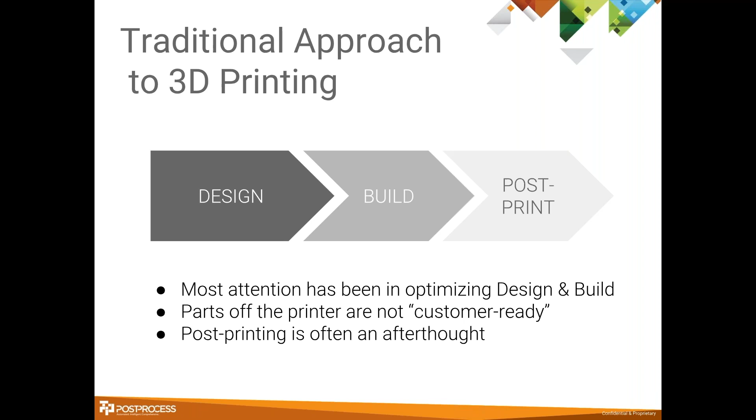We want to dive a little deeper into what this problem causes when we're not able to truly optimize our post-print solution. What we see, and hear a lot from our customers, is that as they're scaling, as they want to take advantage of the speed and agility of 3D printing across different platforms, and increase volumes to get repeatable, customer-ready results, they realize they have a shortcoming in their workflow.

Because a lot of the current methods today really revolve around, number one, manual labor. Whether you're picking up a pick, maybe a grinding wheel, or just tools lying around, trying to get this material off to get these parts how they were intended when you designed them.

So you end up also reaching for traditional manufacturing approaches. Your facility might already have bead blast equipment or an old school tumbling machine. You try to throw some parts in there and realize your parts are breaking, it's cumbersome, and you don't have the right people trained properly to operate this equipment. A lot of challenges start to show themselves as you continue to grow.

And they don't solve the problem, because manual labor is always time consuming. There's almost an artistry element to it, where someone has to be a craftsman to be consistent, whether hand sanding or using different tools creatively to clean these unique geometries. So that's very time consuming, and it's really difficult to get consistent results.

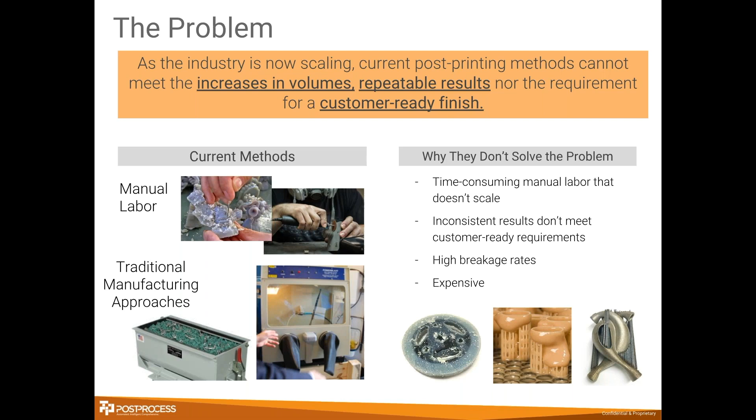With that problem, we want to talk about our solution. At a high level, these are our beliefs here at PostProcess: it's really about automating the finishing of 3D parts through a comprehensive system of hardware, software, and chemistry. And then our three key benefits.

The first being consistency, which is actually the number one benefit - that kind of surprised us, but based on customer feedback, that's where the industry is going. They want parts that are repeatable time and time again, whether operator A, B, or C steps in. They want to be able to get consistent results, and they want to really create a channel for unlimited throughput.

And of course, they want to make an investment that's going to make them their money back. So we understand how important that is.

Hardware and software chemistry all in one place is truly unique, and really our backbone is the software. What the software does is ensure that the hardware and chemistry are working together in unison, really optimizing the chemical and mechanical energy.

So you see a couple examples over there: motion, ultrasonics, fluid flow, heat. We get into things like pressure and friction and all these sorts of what we call rates of removal. So the software side of things really allows us to take advantage of those different energies and optimize it.

And not only that, continue to grow. So we're not a static solution. We continue to evolve because we have software as our platform.

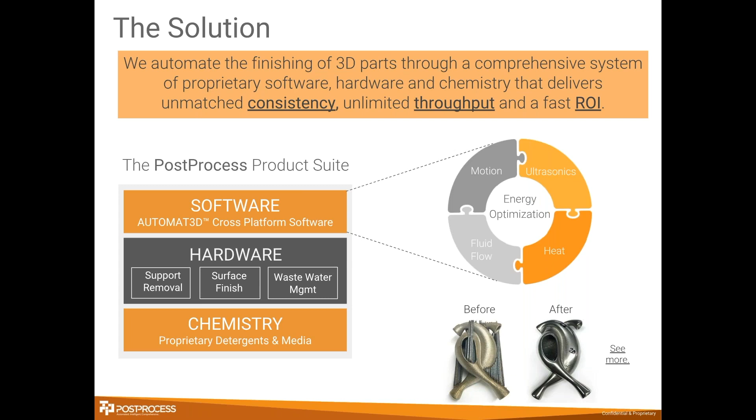Just to highlight these key customer benefits: repeatability, even with complex parts. And that of course is the real challenge. These nooks and crannies, interior channels, and all these different challenges that, time and time again with manual labor, people are human and they're going to miss things, and that can become really challenging to get that consistency.

And then actually removing that bottleneck, as I mentioned, if you're printing 100 parts a day, but you're bottlenecked to only post-process 5, then of course you're going to run into issues.

And then being able to produce and post-print in batches, really significantly reducing labor costs.

And really what we like to talk about is repurposing those labor costs. So someone might be doing this hands-on work that you can automate and use that skill set in a different way throughout the facility or manufacturing workflow that really takes advantage of some of that repetitive hands-on work and really get that ROI. So minimizing breakages, reducing labor costs, really getting a fast payback compared to industry standards.

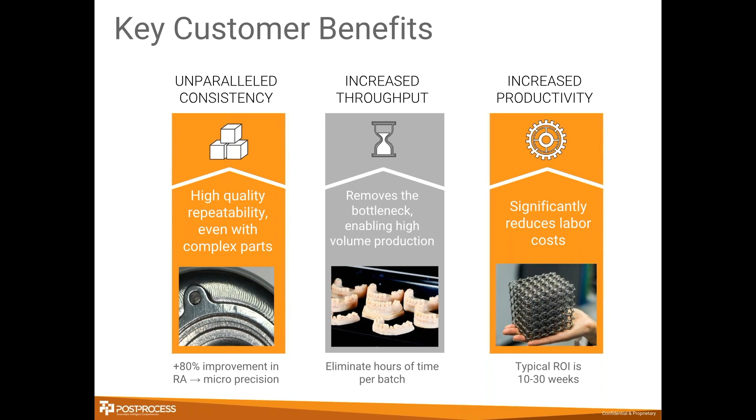So to sum it all up, yesterday's standards are very restrictive. It can be very expensive, especially when people start diving into it and crunching some of these numbers that tend to slip under the radar sometimes. Very time consuming.

It's very hard to create a predictable workflow and make promises to customers when you create this bottleneck. And of course, we're talking about opening up that bottleneck with automated, intelligent, and comprehensive solutions.

So we get into both support removal and surface finishing. It was highlighted in the previous slide. I glossed over a little bit, but what we're going to be diving into is both our support removal and surface finishing solutions to show how we could add value to you and your customers.

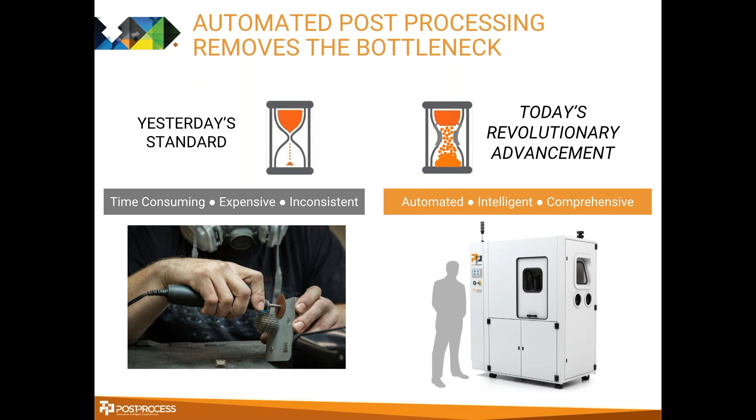So we'll start with the support removal solutions. We really have two different levels, I'll call them, of support removal solutions. And first, I'll introduce just the design series.

So these are very desktop compatible, very small units, might be great for the education department, very small parts, maybe very low volume. These particular units have ultrasonics and they also have heat. What they don't have is pump flow.

And I mentioned software. These units have a very simple PLC software, and I'll get into our platform in a moment, which really takes it to the next level. But there is some software controls here, but these are really our small support removal solutions, and it's for basically a niche low volume market.

But of course, we're talking about providing people the opportunity to scale. So I want to spend more time on the production series units.

And this is where we start really getting into our software, which we call AUTOMAT3D. I'll do a segment on that in a moment where we'll really dive into the value of our AUTOMAT3D platform system. But these production series units are really for high volume, low labor.

So what we're talking about here is actual batch processing and really leveraging that power of software. So we get into two main technologies here.

As you can see along the bottom, you have a couple different icons. So this first set here with the Centi and the Demi, this is called Submersed Vortex Cavitation, and we'll dive into that. And then we have the DECI and the BASE, which is actually a spray technology, completely unique to the industry, and that's our VVD, or volumetric velocity dispersion technology.

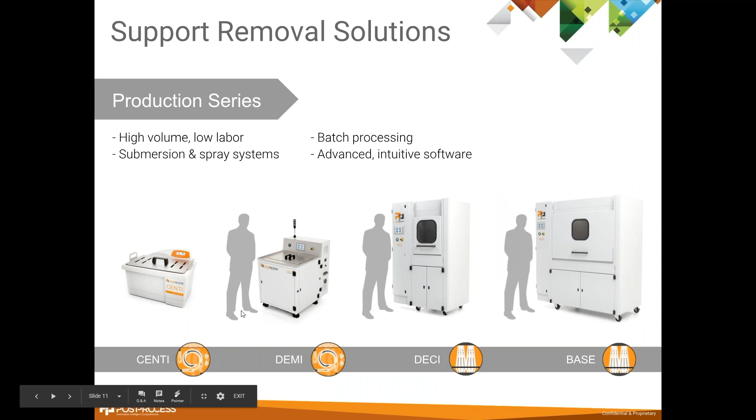What these units really do is create a rotating motion while parts are immersed in fluid, disposing of support material to provide even exposure and induce mechanical agitation. I mentioned mechanical rate of removal and chemical rate of removal, and what we're doing here is trying to bring those together.

You want to submerge a part in our proprietary PPT detergent. I'm sure you've heard of different SCA tanks or waterworks systems, and you might say, okay, I've submerged something before. The real difference here is the vortex action that we're able to create.

The idea is you might be able to submerge a part, but if it sinks to the bottom or floats to the top, you're not giving it even exposure to temperature, ultrasonics, or the agitation of fluid flow. So we want parts that want to float to sink a little, and parts that want to sink to float. You want to create this suspended, vortex action to get tumbling while submerged, for even exposure to ultrasonics and other mechanical energies. That's the big difference.

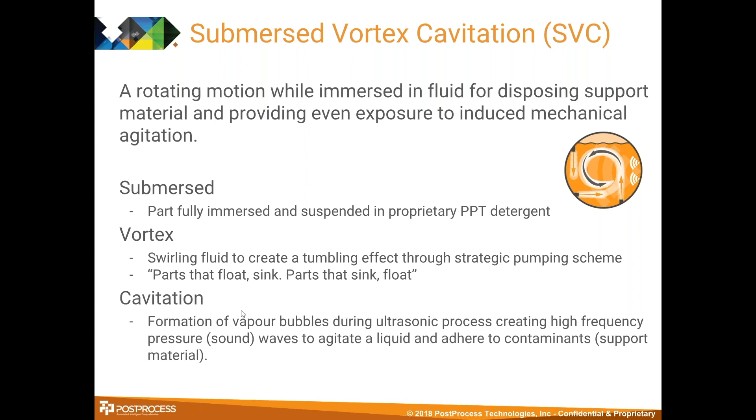Cavitation is really just the ultrasonic side of it. Those are sound frequencies creating vapor bubbles, a mechanical means of agitating the support material, working like scrubbing bubbles to remove that support material.

We like to show a schematic of this. Basically what you're looking at is the vortex action with the ultrasonics on the right-hand side. I won't dive too deep, but the technology here is really about suspending the part so it gets even mechanical agitation to expedite the support removal process.

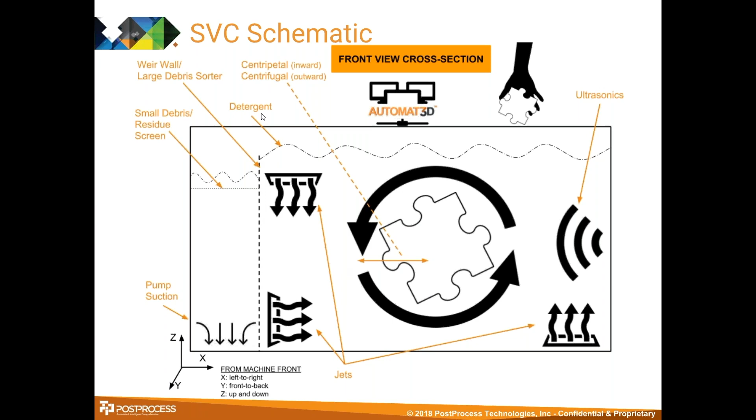Another huge advantage here is the filtration system we have to extend detergent life and minimize maintenance.

The next technology is the volumetric velocity dispersion, the VVD, our spray technologies. The big difference is we're using fluid flow, so these parts are not submerged. They sit on a part tray exposed to high volume, not high pressure—only around 25 to 30 PSI—getting doused in the chemical without having to submerge. This gives great cycle time improvements leveraging this mechanical agitation, fluid flow, versus just submerging.

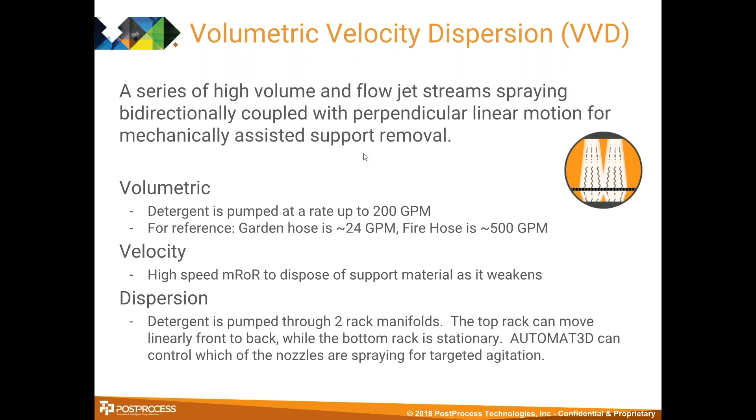This is another great opportunity for soluble support removal, in FDM, PolyJet, and even SLA resin removal. Essentially you put a part on the tray, with a spray rack on top and bottom. The one on top moves back and forth to create a sweeping motion. It's a primitive explanation, but you can almost think of it like popping it in the dishwasher—of course much more complex—putting parts on the tray and leveraging the fluid flow and chemistry to expedite cycle time.

Very minimal maintenance, simple filtration, very much a one-touch button to process your parts—a very powerful, unique technology in the industry today.

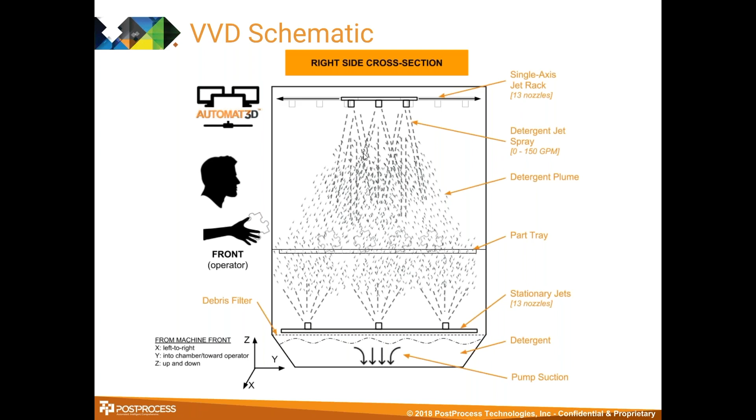So those are our two main support removal technologies. I want to make sure we have time to dive into the software and chemistry, so I'll move right to surface finishing and hopefully save time for questions at the end.

Surface finishing: we have design series and production series again here. On the design series side, these are designed for simple, one-touch, pre-programmed frequency and cycle time—a one-stop shop, versatile machines that minimize complexity. If someone just wants simple operation without getting into the software, just a one-button touch to process a wide variety of parts, very low decibel, powerful systems.

We have two designs here: the Rador, a rectangular surface finishing solution, and the Levo, a circular, higher frequency design. These are one-stop shops—plug and play, press a button, powerful solutions.

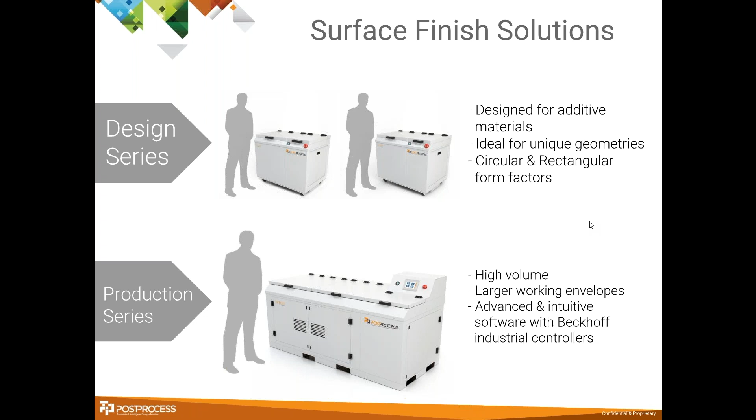And then we have our production series unit, the Nitor, which does involve our automated software, which starts introducing agitation similar to our support removal units that use different ways of agitating mechanically to be able to vary frequency. This can work with much higher volumes, much larger working envelope. Both of these solutions are considered suspended rotational force technology.

Essentially, you're putting parts within media, and the big difference here for us is being able to digitally control that amplitude and really control the force applied to that part. That's the real power of suspended rotational force, which is really unique in the industry, being able to dial in those frequencies to handle your most fragile part all the way up to robust alloys. That's the unique power of suspended rotational force.

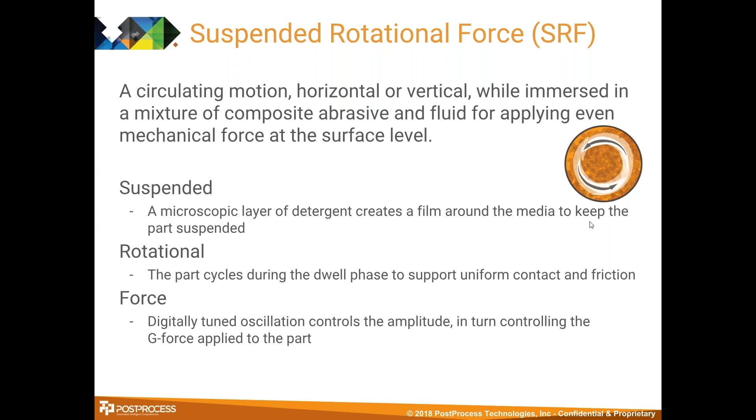So if we look at a cross section of the SRT technology, essentially what you're looking at is us being able to control what we see here, the amplitude is Y1 and the potential energy is Z1. So we can really control this amplitude to optimize that dwell time, optimize the time that this part is submerged in media. And when we're able to control the frequency, we start to generate this additional force that creates this additional rotation for us.

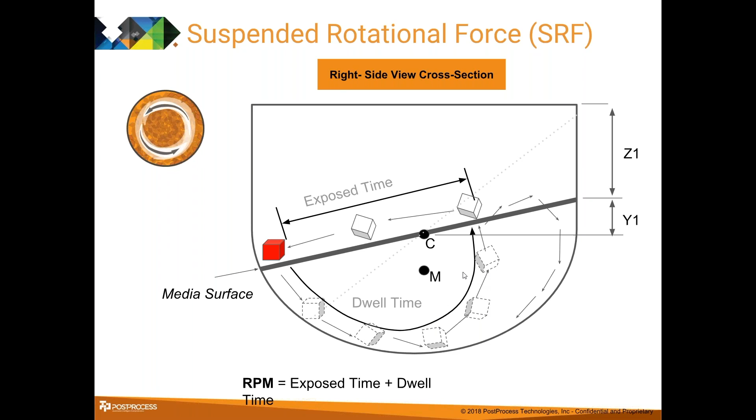So while this part's submerged in media, it almost rotates like a planet, orbiting. It rotates itself, but it's also rotating on a larger axis. That's what we want to be able to do to really optimize that time that the part is submerged in media. And being able to digitally control that is what gives us the unique advantage.

And then we also have the hybrid solution. In the hybrid solution here, we have one machine that falls in this category and is very powerful, and it's the Deci Duo. So really, this is a spray technology that also involves suspended solids. It's very versatile, being able to adapt to different support removal technologies or challenges, as well as surface finishing challenges, all in one machine.

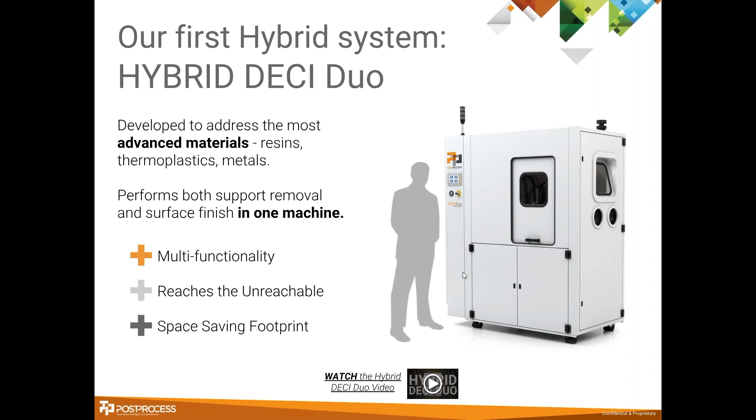So it's unique in the sense that it uses a spray technology, but instead of high volume like we're talking about with the VVD technology, this is much more direct, higher force with suspended solids. So it's much more of a mechanical means of removal. Excellent for different surface finishing.

We've had a lot of success with this technology with powder removal. So MJF and SLS, being able to remove powder and do initial surface finishing all in one step.

And really the unique advantage here, or the key word I like to point out, is the fusillade technology — really the controlled jetting, being able to either provide a high powered blast to be more aggressive for robust parts, or dial it way back to surface finish different polyjet, FDM, or SLA parts. So a lot of flexibility with this unit as well.

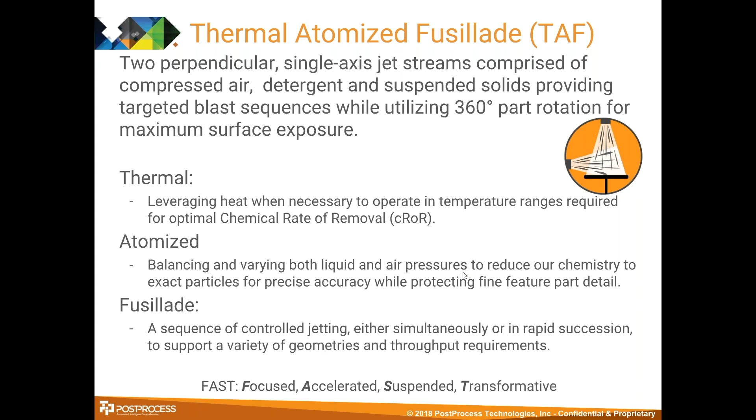So this is a quick schematic of what that looks like. We have two single axis jets, those high powered jets that we can control with our automated platform, and a turntable in the middle as well that allows really complete coverage as we're able to move those jets up and down, back and forth, and rotate the part.

So a lot of advantages to be able to dial in if you want to just focus on a specific surface with this, or if you want full coverage — just a lot of flexibility. And really what gives us that flexibility across all of our machines is the software.

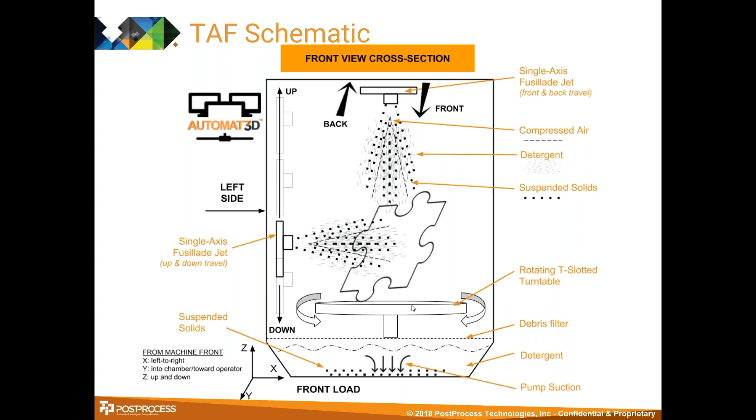So just a brief software overview, because I know we're running up against the clock here. We have so much to share, but really what it boils down to is the agitation algorithm. So we don't take just a single approach. Other machines, you might just find you sort of turn it on and set a temperature. We have pre-programmed recipes that vary the agitation levels and temperatures.

One of the examples I like to use to have people wrap their mind around it: if you were washing your dishes at home, you wouldn't just spray your dishes and leave it in one spot, right? If you had a bowl in your hand, you'd be rotating the bowl, rotating your hand with the sprayer, maybe varying the temperature, hot and cold. That's what we do, and we automate it.

So we're able to dial in for those needs. For those fragile parts, we can dial back the temperature, take a less aggressive approach as far as using agitation goes, or we can take a more aggressive approach for those robust parts to really optimize and dial in that cycle time for customers.

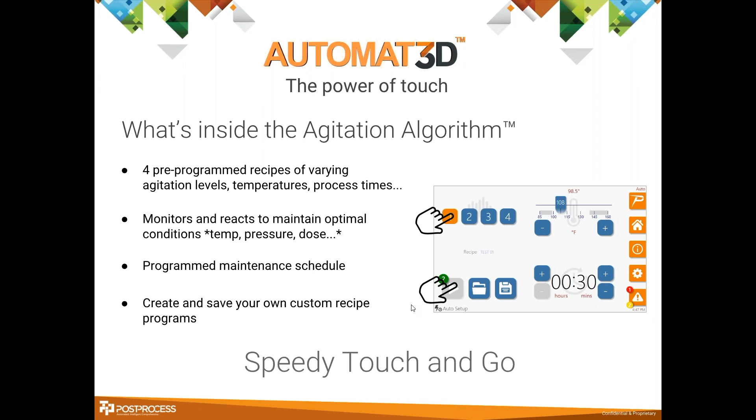And the beauty of it is once you dial it in, you can save it. So a user doesn't even have to worry about all those background parameters. They can just pop a part in, call up a recipe or an agitation algorithm, press play, and get those repeatable results we talked about at the top. That's the power of automation—it becomes very intelligent for the operator and really gives them peace of mind.

You know you're running these optimized, proven-out algorithms, and you're also able to have other advantages such as maintenance reminders and different alarms to make sure the process remains in control. So the temperature you set, the system will understand if you're getting out of range, and it'll understand if your tank level is getting low and that's throwing off the pH balance.

So all these reminders give you peace of mind, so you don't have to worry about these things. AUTOMAT3D is going to run the cycle for you and also make sure that anything that impacts that cycle is going to be monitored as well. So, very, very powerful.

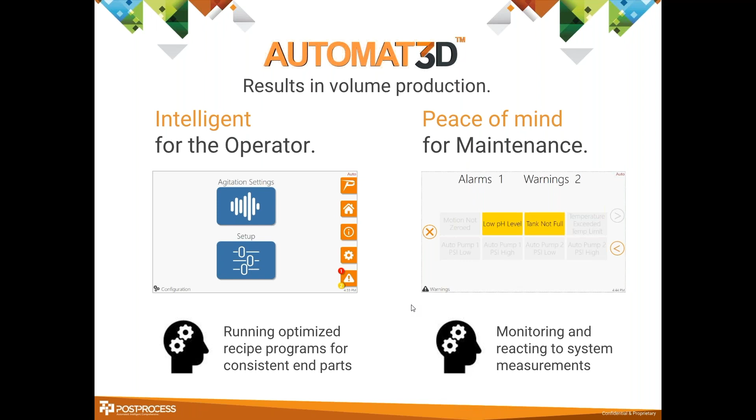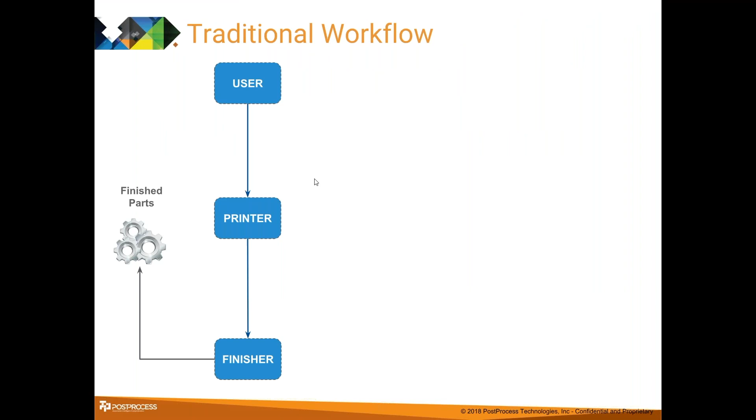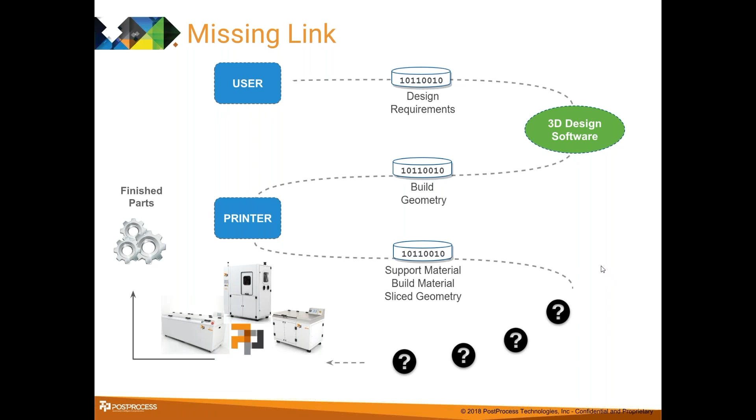One of the things we like to touch on is that AUTOMAT3D can go beyond what it's doing today. You have this traditional workflow that goes from the user to printer to finisher. We like to talk about this digital thread, and we're doing a great job connecting that today. In the future, we're looking to get to a position where users can just upload their STL files, and we can tell them, hey, this is what you're looking at for a post-print cycle time, a post-print solution, a post-print technology.

So we've started to unveil what we call our connected technology. I wanted to share this to give you a view down the road of the direction this is heading. As our customers adopt the software technology, they're really setting themselves up for a great foundation for the future, as people introduce digital factories and so forth.

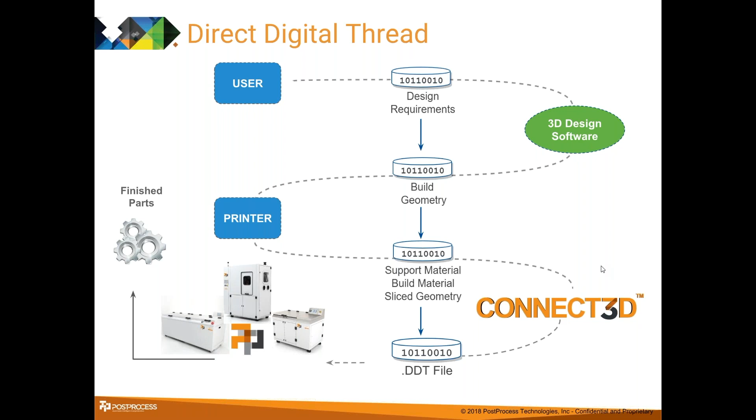So we do have a proprietary DDT file. I won't spend too much time on that, but it's really taking in all these different factors to make sure you're getting an optimized solution.

The last point I'll touch on is our chemistry. We have proprietary detergents for all your common support removal needs, whether it's PolyJet, FDM, or SLA, and we also have different media to address both the SRT technology, where you're submersing a part, or the TAF technology—the thermal atomized fusillade of the DECI Duo with suspended solids—so you're able to take a more aggressive approach with more of a spray technology for surface finishing.

One of the beauties I always like to touch on for our detergents is that they are pre-mixed, so you don't have to have a chemist in-house, and you don't have to worry about dosing as your solution evaporates. They're all pre-mixed, and on our spray technologies, they're actually auto-dosed—you don't even have to pick up a bucket. It's all done for you through the automated platform. So again, a lot of peace of mind from a lot of different angles here.

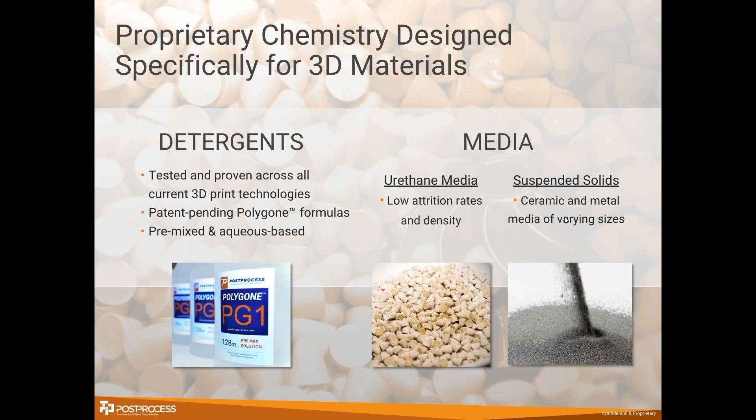We'll wrap it up with the tongue-in-cheek message from Mr. Deming: it's not necessary to change, survival is not mandatory. We know that in order for additive manufacturing to truly be leveraged, this opportunity needs to be presented to the masses trying to leverage additive manufacturing, and we're taking a lot of pride in doing that with our zero-to-one innovation.

So thank you for your time. I hope I wasn't too fast for you—I know there was a lot to cover there.